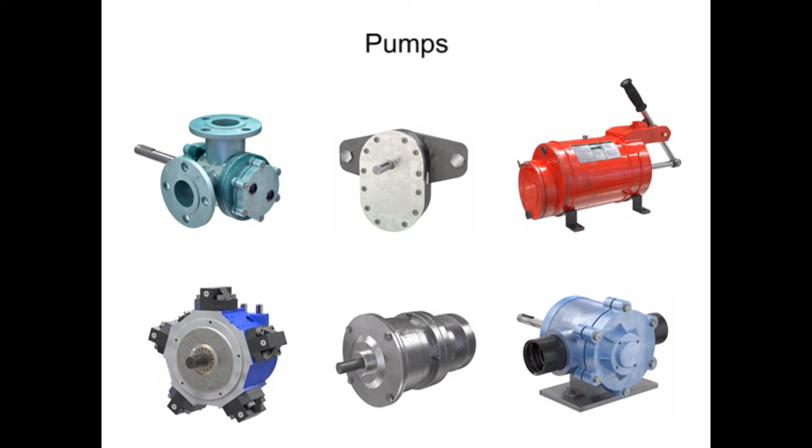Many different types of pumps exist to assist fluid movement in a variety of systems. An external gear pump uses two gears rotating against each other to provide fluid movement.

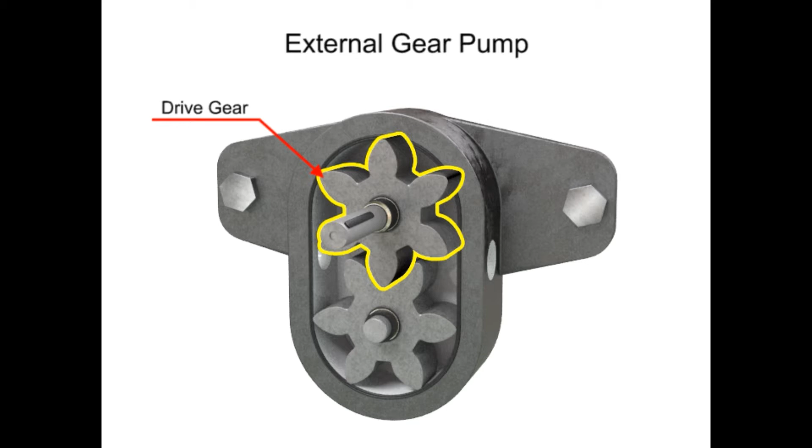One gear is driven by a motor connected to a shaft. This is called the drive gear because it is driven by a motor, and it in turn meshes with and drives the movement of the second gear.

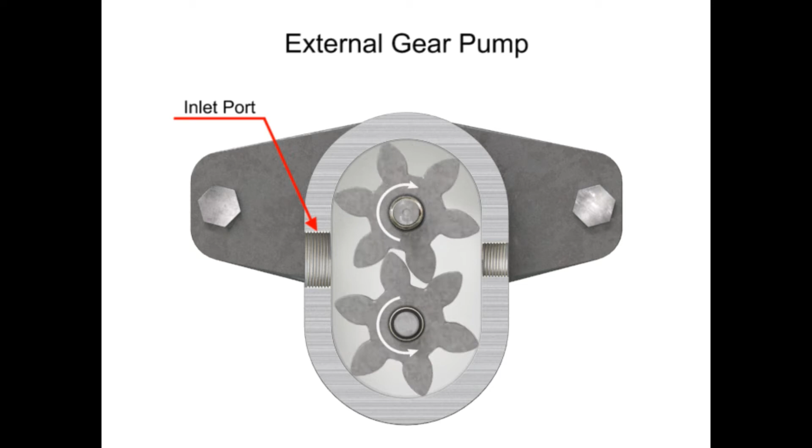As the gears rotate away from each other and come out of mesh, they create an expanding volume on the inlet side of the pump. This creates a vacuum at the inlet port, allowing fluid to flow into the pump.

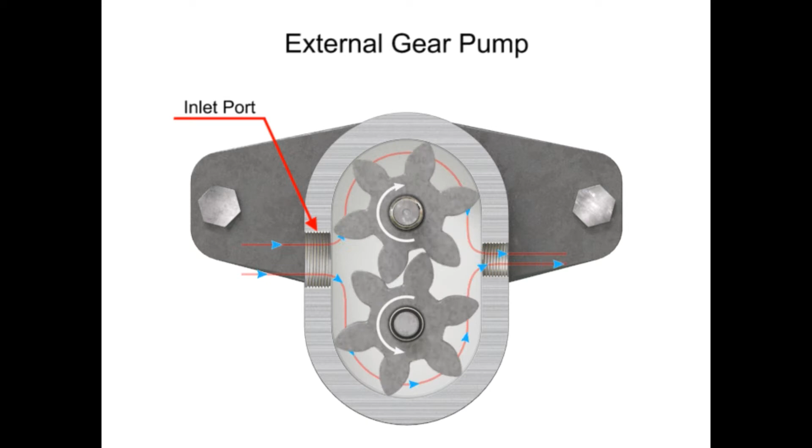Then fluid flows into the cavities and is trapped by the gear teeth. As the gears rotate, a flow path is created around the outside of each one. Fluid trapped in the slots between teeth is carried around and discharged into the cavity with the outlet port.

Meshing of the teeth in the center of the pump seals the outlet port from the inlet port. No fluid passes between the gears.

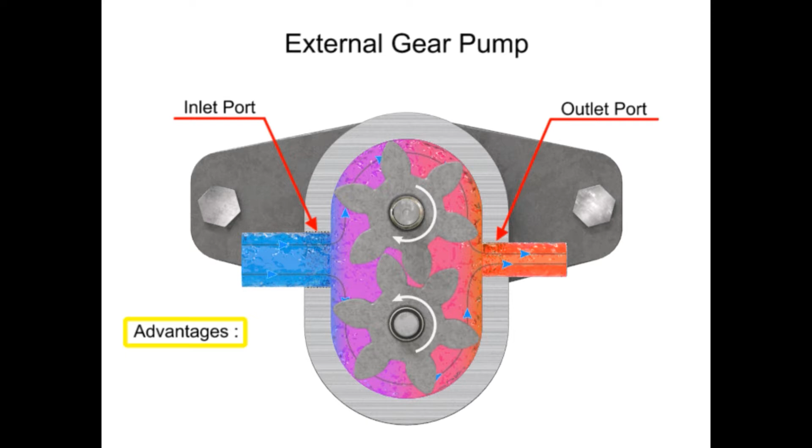The advantages of external gear pumps are their high speed and pressure, relatively quiet operation, and that their design accommodates a wide variety of materials.

Disadvantages include bushings in the liquid area can become worn and that they have fixed end clearances.

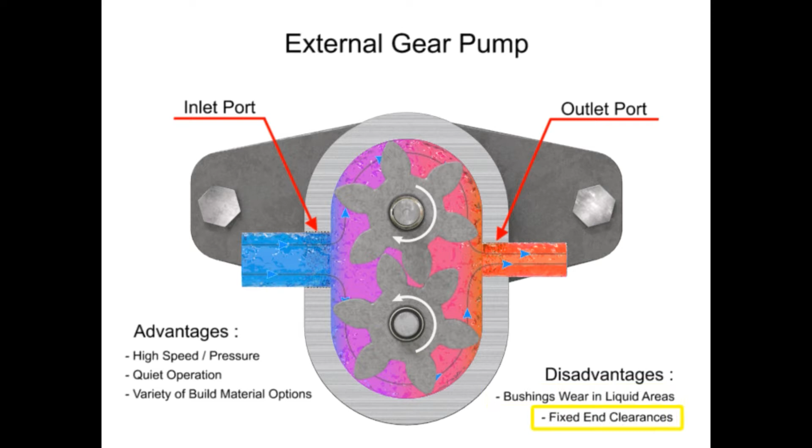Internal gear pumps are exceptionally versatile. This type of pump has one inner gear which is inside a second outer gear.

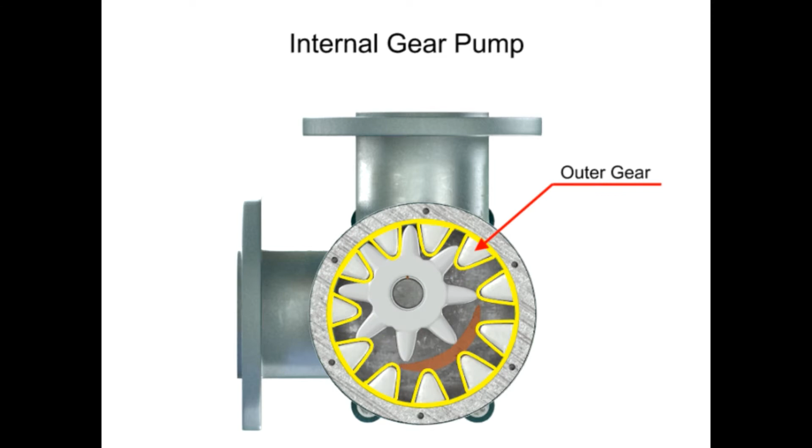The inner gear has a shaft driven by a motor and has teeth that protrude outward. The outer gear has teeth that protrude inward toward the center of the pump.

As the inner gear rotates, it meshes with and moves the outer gear. Liquid is trapped in the gear spaces and carried from the inlet to the discharge. A stationary crescent-shaped divider separates the intake and discharge portions of the fluid.

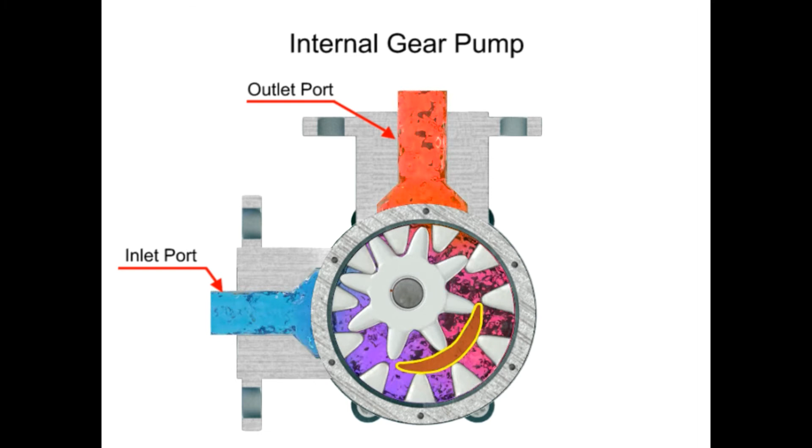Advantages of internal gear pumps are a smooth and almost pulseless flow, and slightly more horsepower for its size.

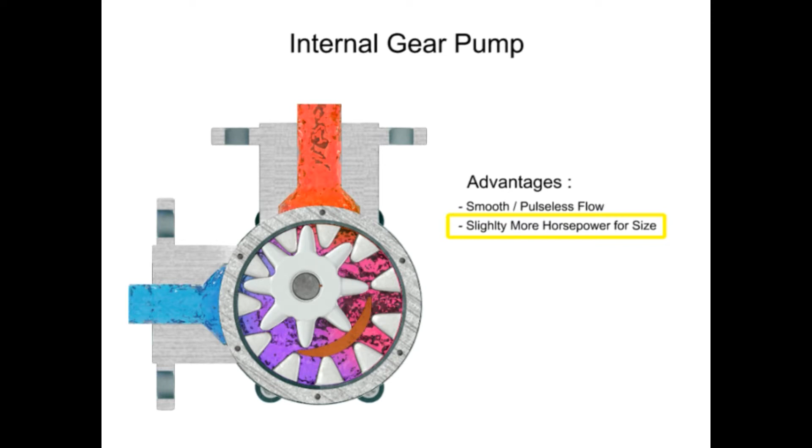Disadvantages are its higher cost, limited size range, low to moderate pressure ratings, and few sources of manufacture.

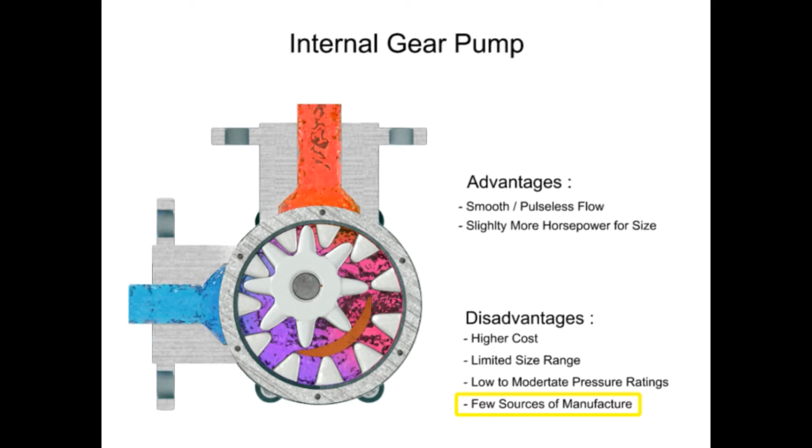A rotary vane pump is a positive displacement pump that consists of vanes mounted to a rotor. The vanes are on an off-center drive shaft.

As the shaft rotates, the variable length vanes slide in and out to maintain contact with the pump housing. The tension in the vanes is maintained by either springs or hydraulic pressure.

As the vanes rotate, they create chambers of varying sizes within the pump. Fluid enters at the largest chamber. As the vanes rotate and retract, the chambers get smaller, forcing fluid to exit through the discharge port.

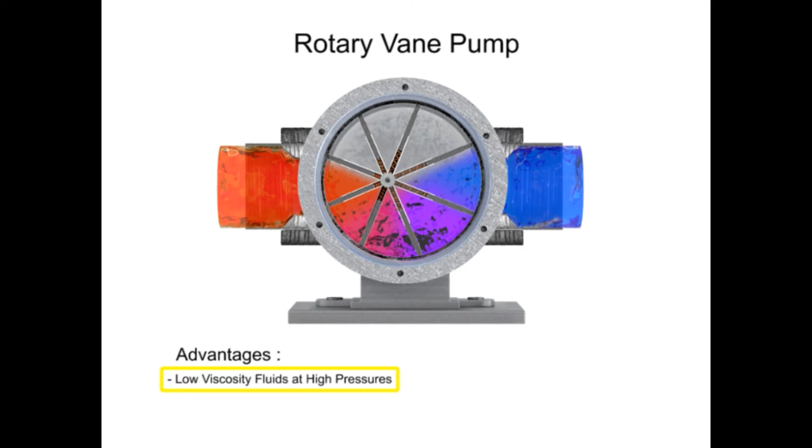The advantages of vane pumps are that they can handle low viscosity fluids at relatively higher pressures, can dry run for short periods, and develop a good vacuum.

Their disadvantages include complexity and their unsuitability for both high pressure and high viscosity fluids.

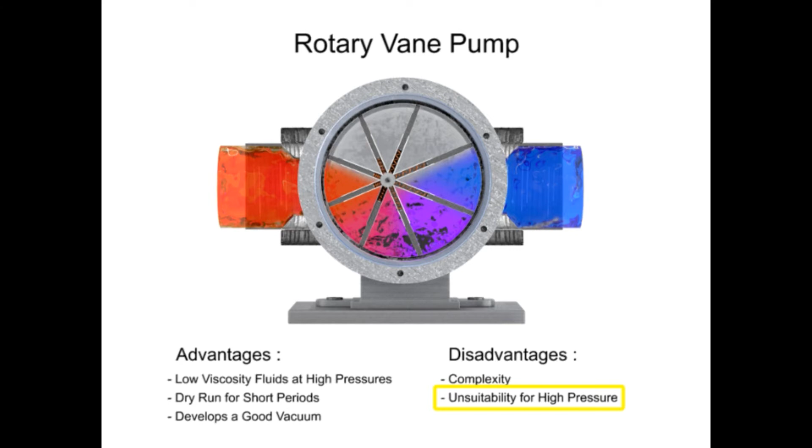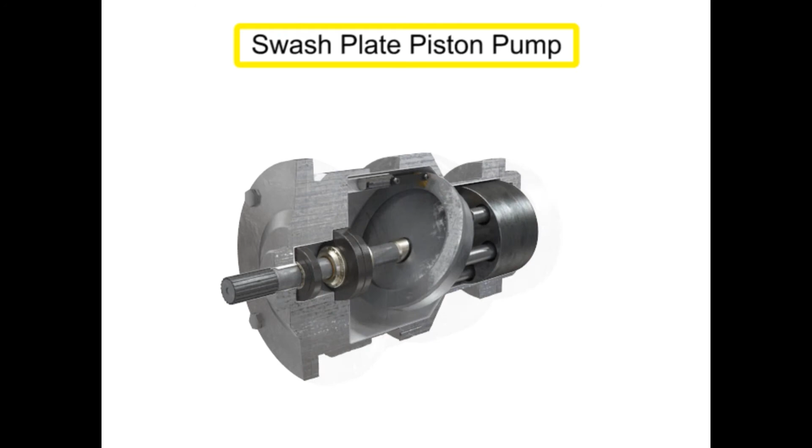Piston pumps come in many different forms. A swash plate is a device used to translate the motion of a rotating shaft into the reciprocating motion of a piston.

Swash plate piston pumps have a rotating shaft connected to a cylinder block containing pistons, which are pressed against a stationary swash plate that sits at an angle to the cylinder.

As the shaft rotates, the pistons move against the swash plate, causing them to reciprocate within the piston block.

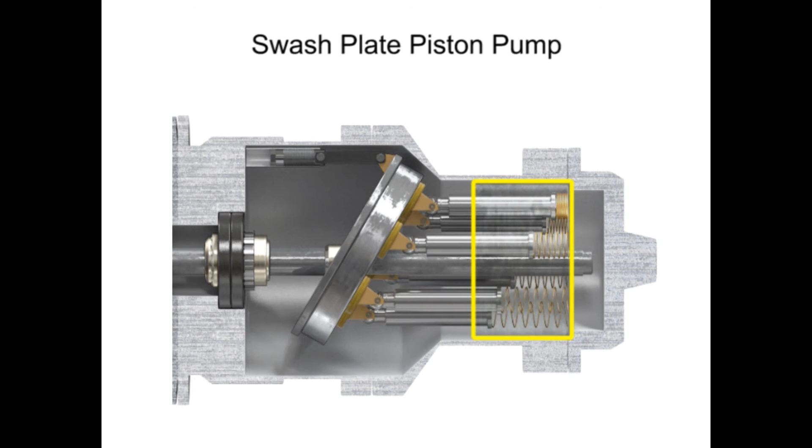The pistons create a vacuum that forces fluid in during half a revolution and expels fluid during the other half.

On the intake stroke, a spring ensures the pistons pull back and maintain contact with the swash plate, causing fluid to fill the empty cavity left behind.

On the discharge stroke, the angle of the swash plate forces the pistons back inside the piston block and discharges the fluid. The greater the slant on the swash plate, the further the pump pistons move and the more fluid they transfer.

Piston pumps, in general, are manufactured with closer internal fits than other pumps. This means that internal slippage can be less, so they operate with reasonable efficiency at pressures both too high or too low for the operation of other pumps.

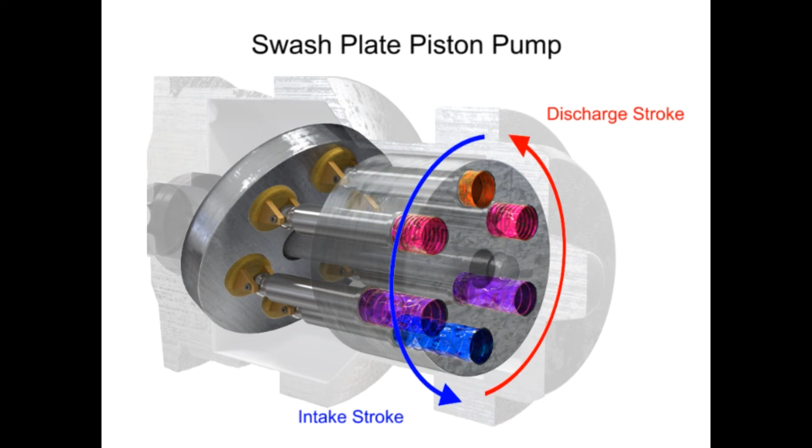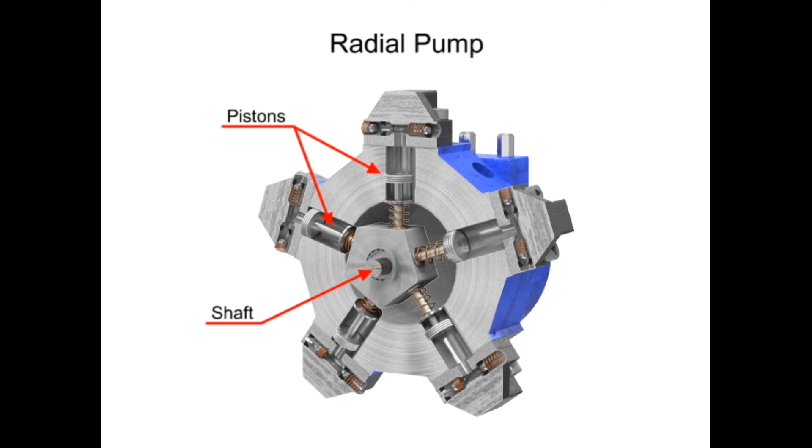Radial pumps are designed so the pistons stroke in a direction at right angles to the shaft. The pistons are arranged like wheel spokes around a cylinder block with an eccentric central cam mounted on a driveshaft.

As the shaft rotates, the cam moves towards the pistons, forcing them down into the cylinder block and discharging the fluid. As the cam moves away, springs help retract the piston and cause the intake stroke.

Check valves ensure that fluid only enters the inlet ports and only exits the outlet ports. Radial piston pumps have a low noise level, very high loads at low speeds, and high efficiency.

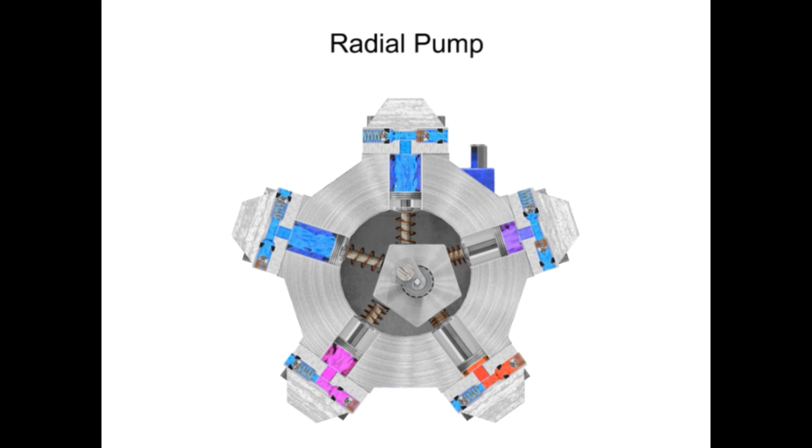Hand pumps are used when a source of power is not available or where the extra expense of a power pump isn't warranted. For example, they are used on shop presses and other portable equipment, serve as standby pumps, and serve as sources of emergency power.

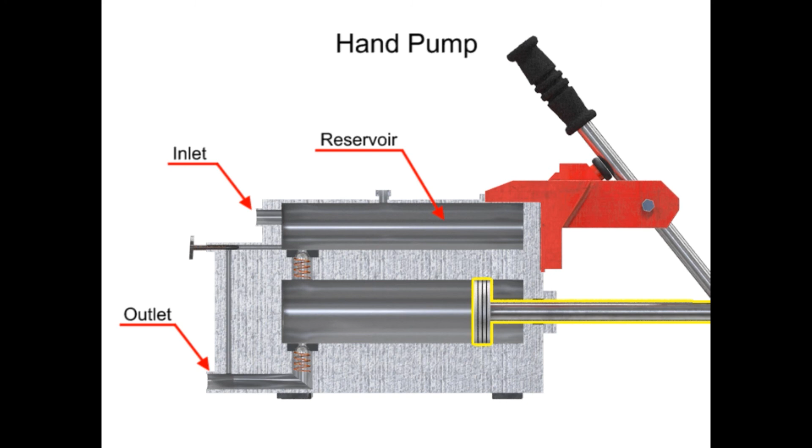Hand pumps are always of piston type and are usually constructed with a piston working between two check valves.

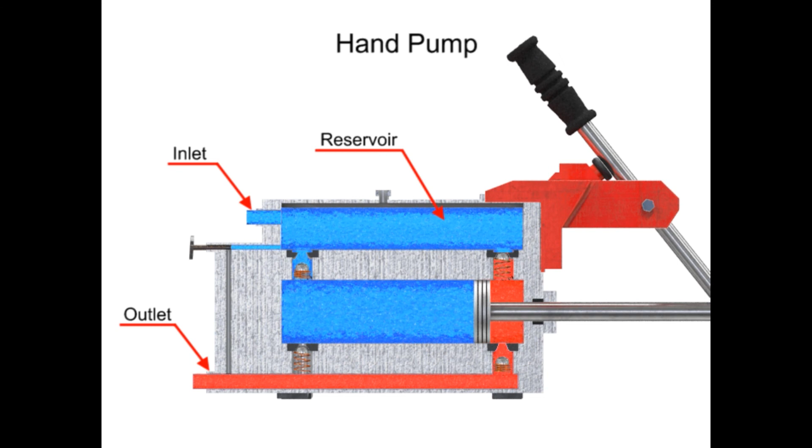Double-acting hand pumps are more efficient, allowing fluid to both enter and discharge on both strokes of the piston. Moving the pump handle in either direction allows fluid to be drawn in from the reservoir and discharged via the outlet ports. Check valves in all locations prevent fluid backflow.